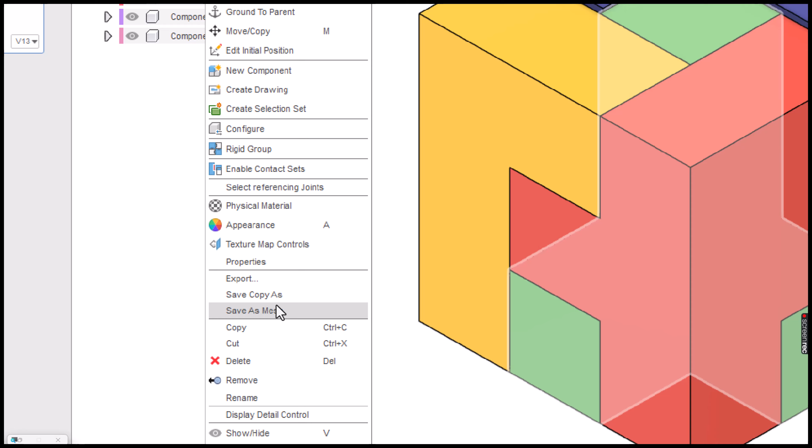First, we need to get our file saved in the correct format. We also need to choose which component we want. I'm going to choose component 1, right click on it, and go down to save as mesh right in here.

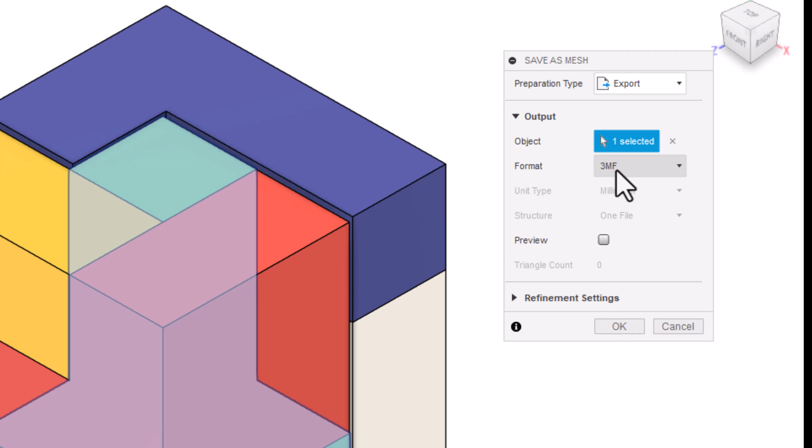And for the Bambu, we're really looking to do a 3MF. The nice thing about 3MFs, if I click in this drop-down box, is that it carries over the units that it was designed in. So that's perfect, we don't have to play that game of scaling and everything else. So 3MF, and I'm going to click OK.

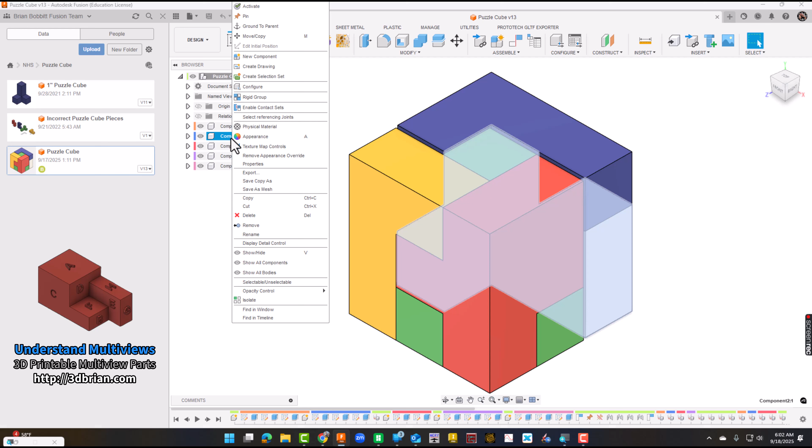Then it's going to ask where you want to save it on your computer. I'll say let's do that in our downloads folder, and I'm going to save it. I'm going to repeat this pattern for every part I need to print. So I'm going to go to component 2 now, save as mesh. I don't have to do anything else, it remembers the last thing we set it to, so I'll just follow the same format. Then I'll go to component 3 and do it as well.

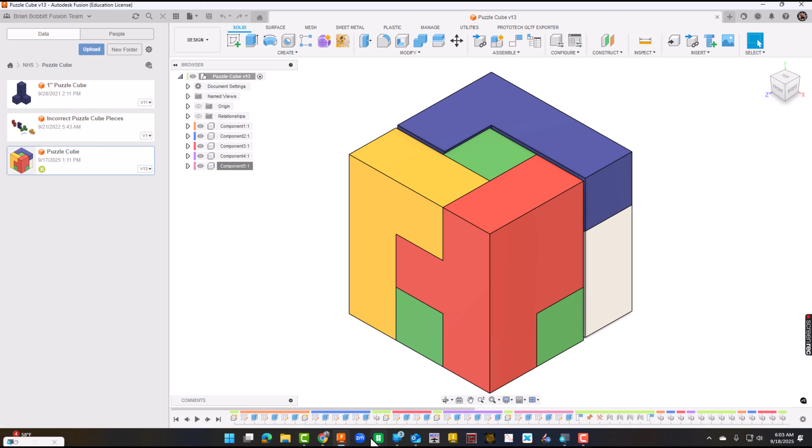So we're really done with Fusion. Now I'm going to go into the Bambu Slicer. This is kind of what it's going to look like, it pulls up recent files you've done and all that. I'm going to go to Prepare here, and this is the actual slicer now.

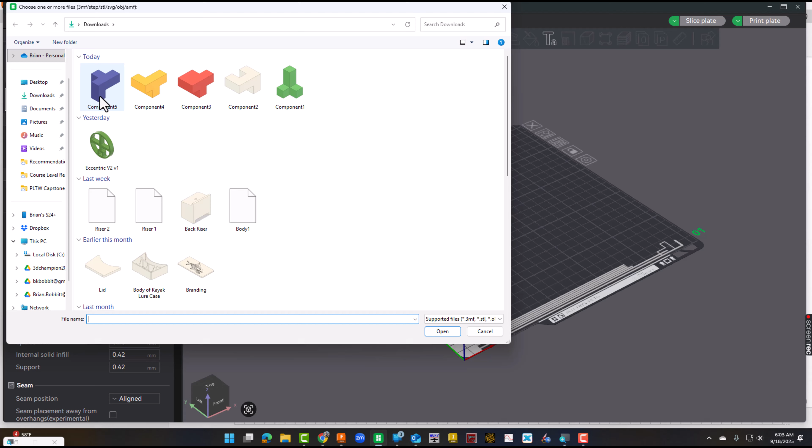I'll go up to the top where it adds new parts right in here, the plus sign. I'll click it, and it's going to pull up my computer. I could pull all of these in at once, or I could do one at a time. I think I'll just do one at a time. So here's component 1, and that's kind of what it looks like.

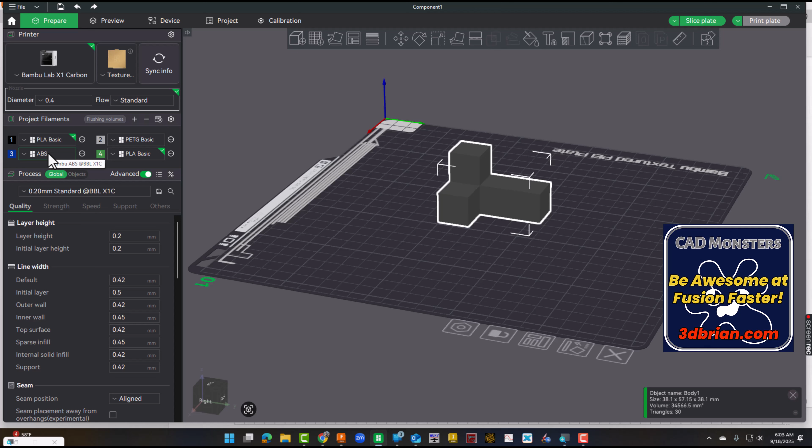That's going to print pretty well the way it is, and it's not going to need supports, which is really good. Now, since we have an AMS on our printer, which means we have 4 colors to choose from, you could have additional colors too, I could say I want that to be color 1, or perhaps color 2 here.

I could choose that right now by going to Objects, and then right here where it says 1, that means it's going to go to filament 1. I could double click that, just click in the box and choose 2. As soon as I click off, it'll go ahead and make that change.

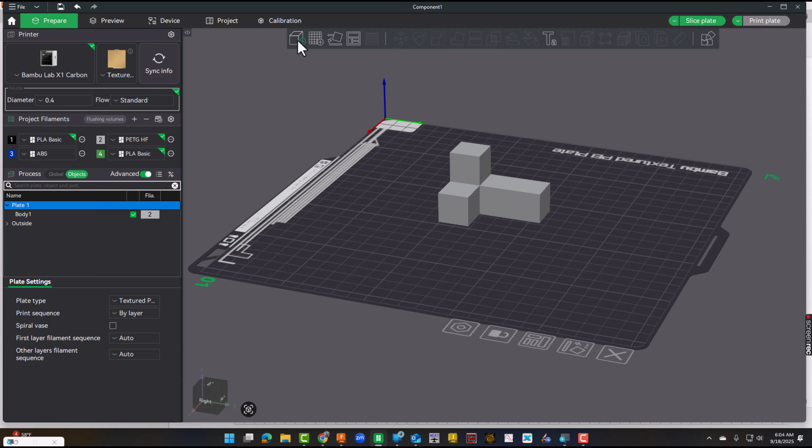I'll go ahead and do another plus, and I think let's pull in component 2 here. This is going to pop up, I just say import geometry only. Now you see if I go ahead and print like that, and we can drag that and move it around, if I do that then I'm going to have to support that.

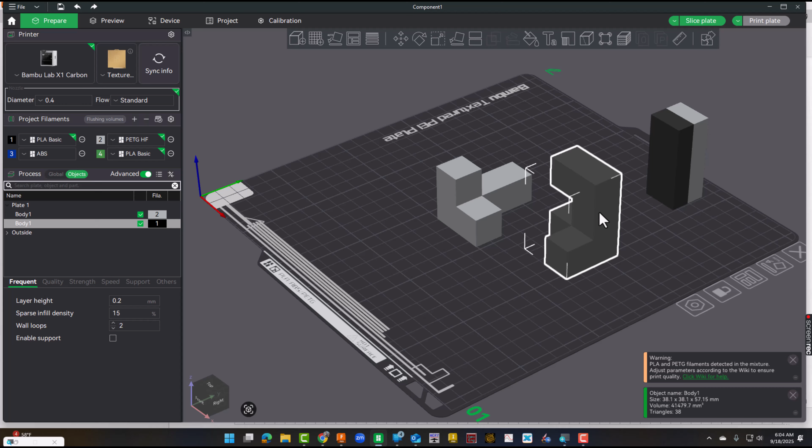So I want to lay that out differently. I'm going to choose the Lay on Face tool right here, and I'll just click like that. Okay, now that's going to be support free. Now you notice over here we've got 2 colors. Anytime we do more than 1 color, it's fine, but it's going to add time to it.

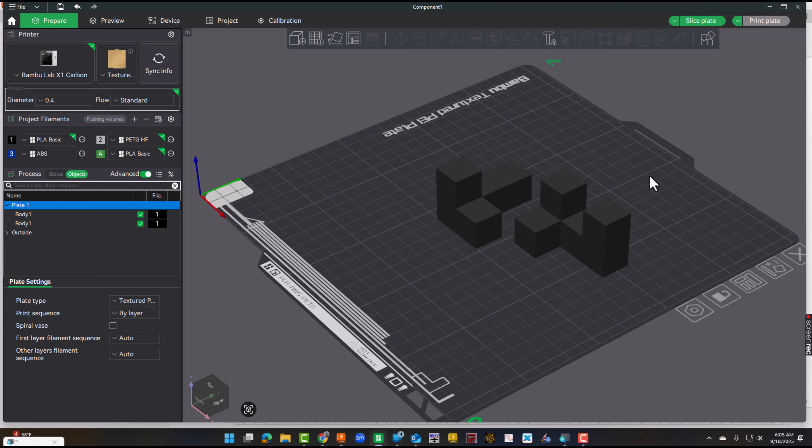Or, I think what I'll do now is just change that body. I'll change body 1 back to the first filament. One color is always going to be quicker than multiple colors.

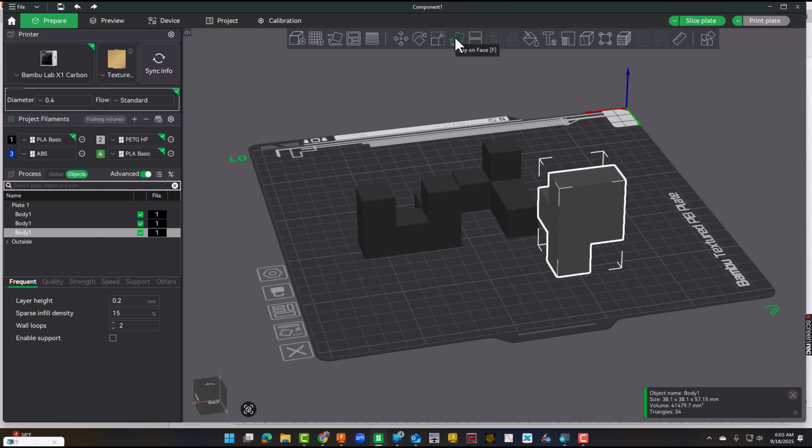So now I'm going to go back to add a part. We'll do component 3. Import geometry only, I've got to make sure that's lined up well to print. Right now I'm going to have to support underneath here, but if I orient that differently, like lay flat or lay on face, now it's going to print without supports. And that's what I want to do, that's going to maximize our efficiency on time.

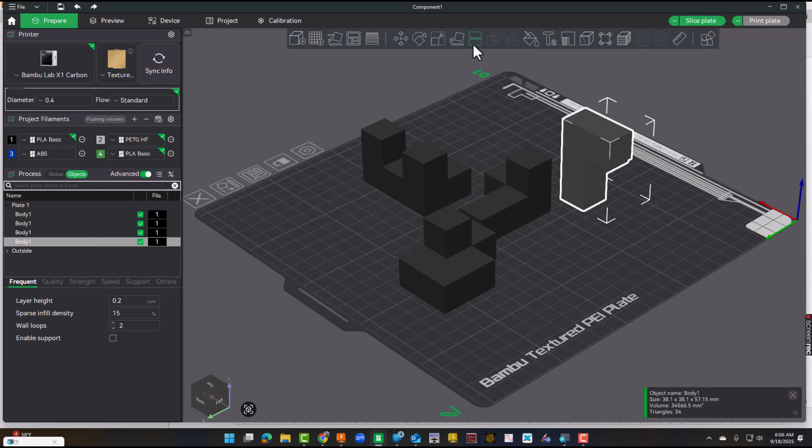I'm going to go ahead and pull in component 4, import geometry. There it is. As I look at it, I can see there's a couple ways I could 3D print this one. I'll lay on face, I'll do it that way. So all of those so far, nothing needs supports. We'll do one more because we had 5 components.

Import geometry only. There are several different ways we could go with that one, but I'll do the lay on face.

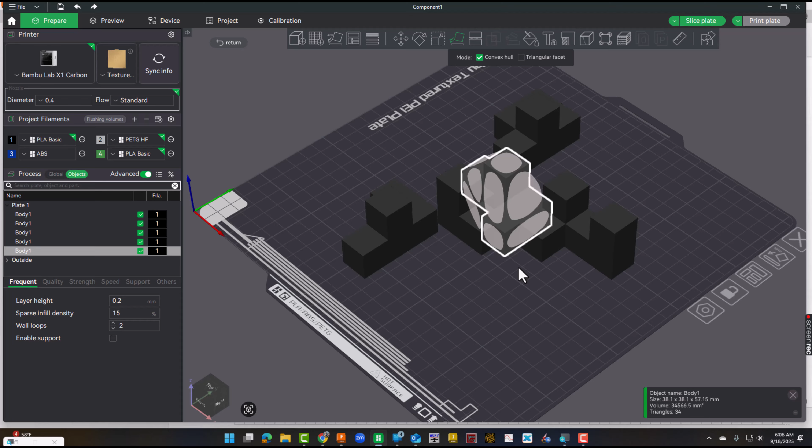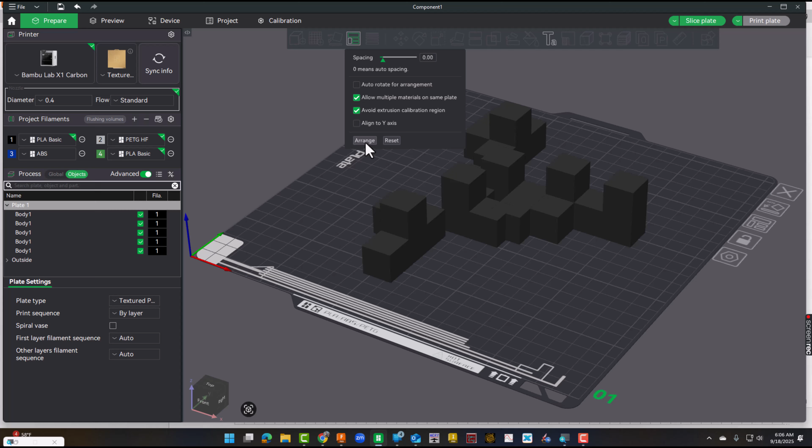Now, obviously, we've got parts on top of parts. We want to organize those, so I'm going to go up here to the Arrange button. You notice those little letters beside them—those are shortcuts. I'll press Arrange, or I could press A. I'll press Arrange, and then come down here and press Arrange again. There are some other options if you wanted to change things, but I'll arrange them this way.

So now we don't have any overlaps. They're pretty tight together. That's a good thing.

What I am going to do, though, because we have several of these that we're going to have to print, I'm probably going to have to scale them down a little bit. I'm going to click and select everything—so I click that part, hold the control key down, and click all the other parts as well. You'll notice I could have probably selected them right over here in this area too.

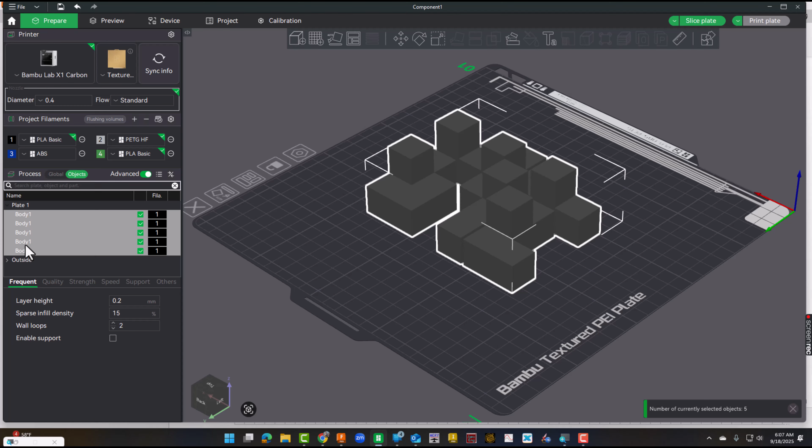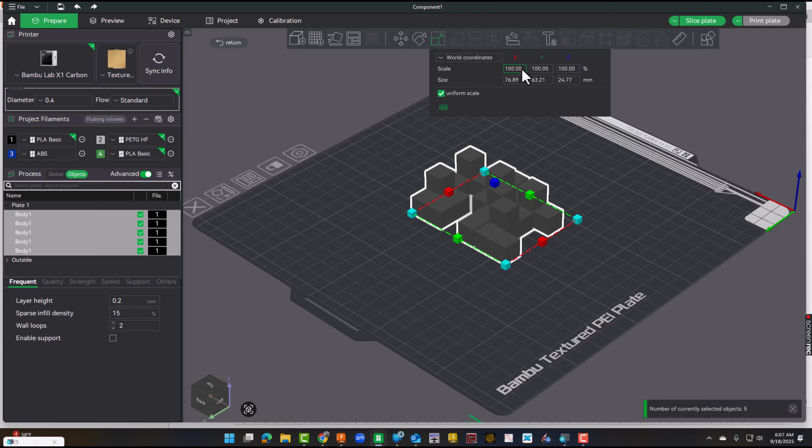Now I'm going to go up here. The scale is about right smack dab in the middle, and right now it's at 100%. Let's take that down and make it about 65. We'll press enter, and it'll make it uniform, changing the Y and the Z for us. So I changed everything, and that's going to be a little bit better for us. You notice it auto-arranged it when it did that.

So that's really it—I've laid it out on the print bed how I want it to print. The big thing there is orienting those parts correctly so that they don't need supports, and laying them out so they're not on top of each other.

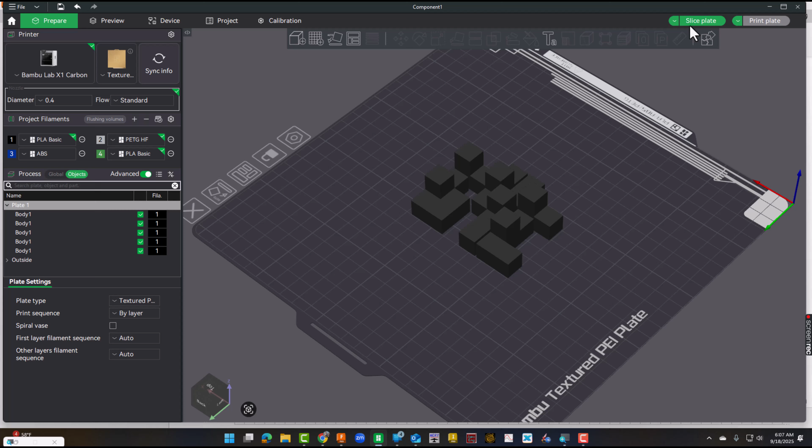Then we're going to click Slice the Plate, the green button. You can see it's taken all that Fusion or CAD stuff and is turning it into G-code right now. It tells us prepare time is 7 minutes 20 seconds, printing time is 37 minutes 41 seconds, for a total time of 45 minutes 2 seconds.

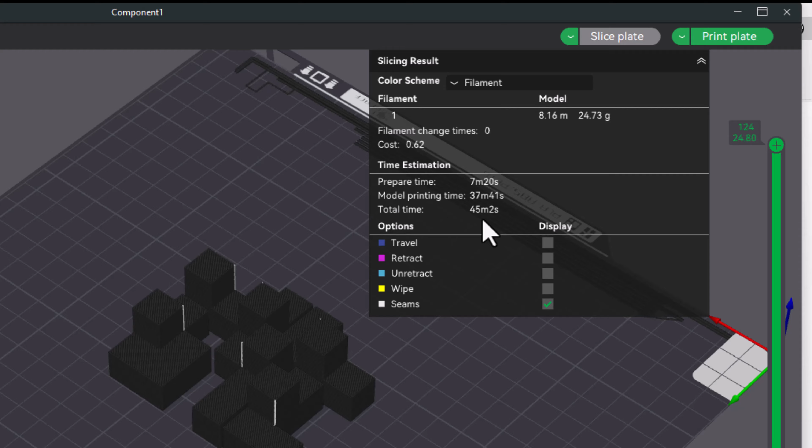So then we just go to print plate, and we have some options here. Before we print, we're going to click in this box. Right now, this is set on the 3D Champion printer, but if I click there, any other printer hooked and connected to my account, I could choose that one as well. So maybe I'll pick the one of ours from school.

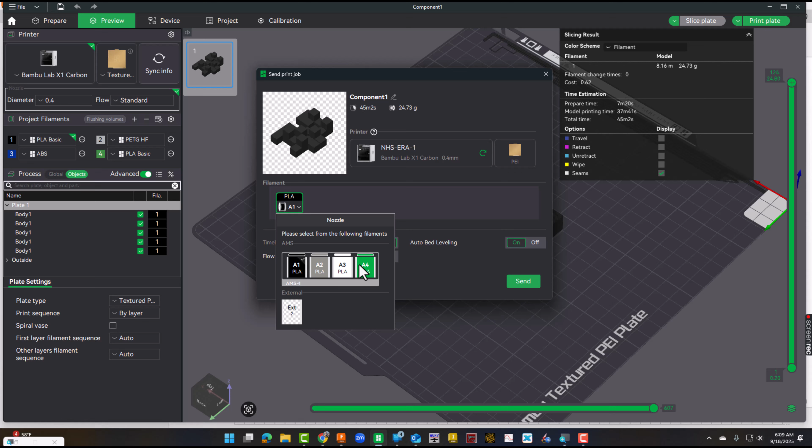It's a synchronizing device. Now I've got one last chance here—I can say, you know what, I was wrong, I want the whole thing to be green. It shows you a preview of what's in there, provided you use Bambu's filament. If you use an off-brand filament, it will still work, but the color choice won't show up without you setting it in another place. So maybe we want green instead of black.

We'll click green—everything will turn green. The last step is we just click send. Once we send, it'll go to that printer and pull up the camera itself. I'm going to click send here so you can see the whole process. Big thing: before you print, before you send, make sure physically the printer is empty. You don't want to print on someone else's project that's already on there.

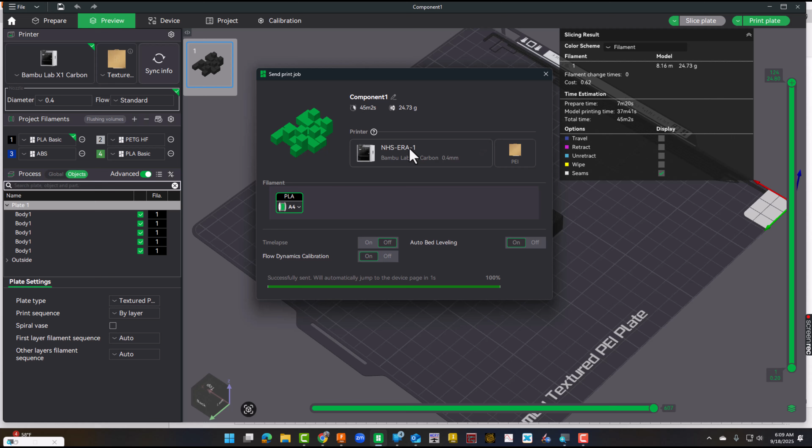So you can see here, it's taken us in and moved over to the device tab. We can hit the play button and access the camera there—you can see inside. You can see some lights coming on, and it gives you some statuses over here, like the extruder temperature and the bed temperature. Now you'll see the bed temperature rise up and then the extruder will get going, and eventually you can monitor the entire thing from here. Okay, so that's it.